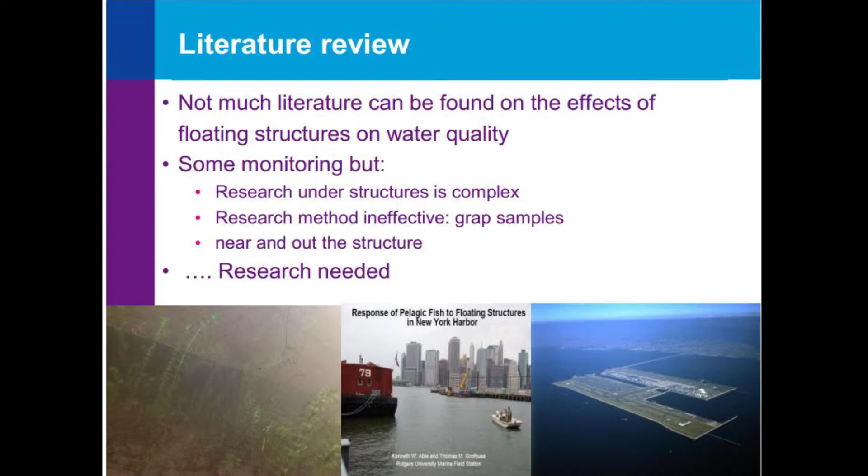So not a lot of literature is found, so more research is needed. That's basically why we conducted this research.

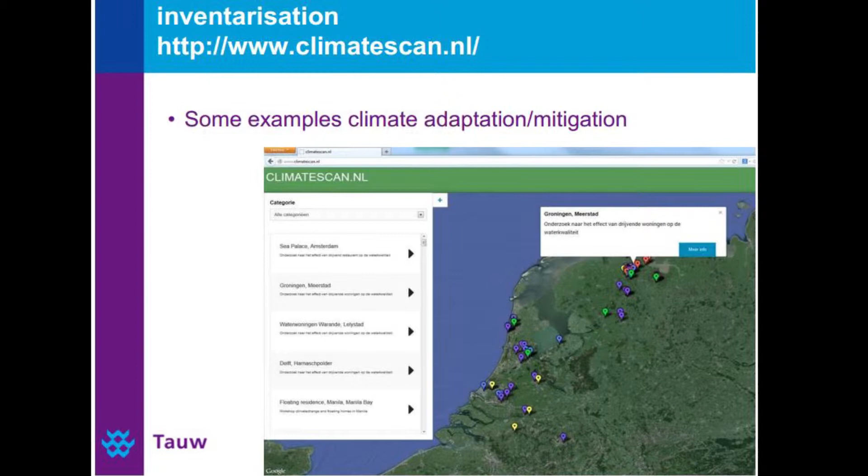So, well, I told you about inventarization. This is a website called the Climate Scan. There are a lot of mitigation and adaptation measures on here from the Netherlands. And when we filter it, we have these research locations on floating homes, which you can see here.

In the Netherlands, there are about 30 locations with floating structures, houses, and other structures as well, which I will show you. On this website, you can click on the locations, and it will provide you a lot of information on the structure itself and on the knowledge, articles and papers being written, and some videos, which I will show you later on as well.

This is a Dutch site. If you zoom out, there's actually some information on Manila, for example, from the Philippines, some workshop that we did two years ago. So it's really meant as a knowledge exchange tool.

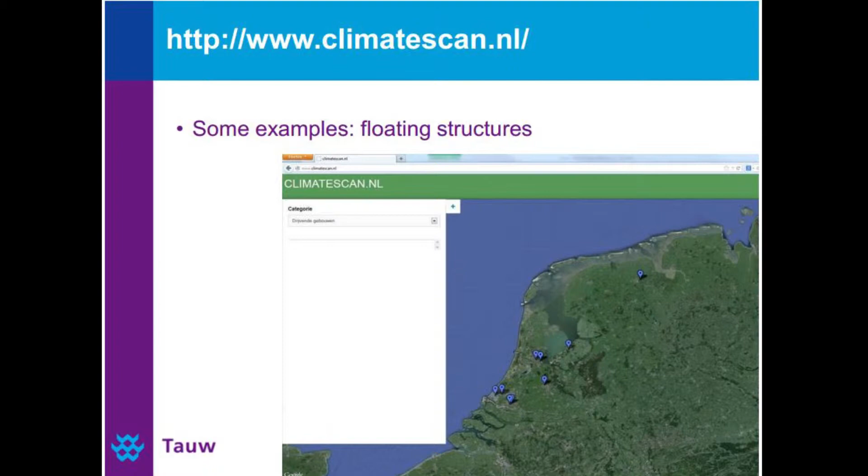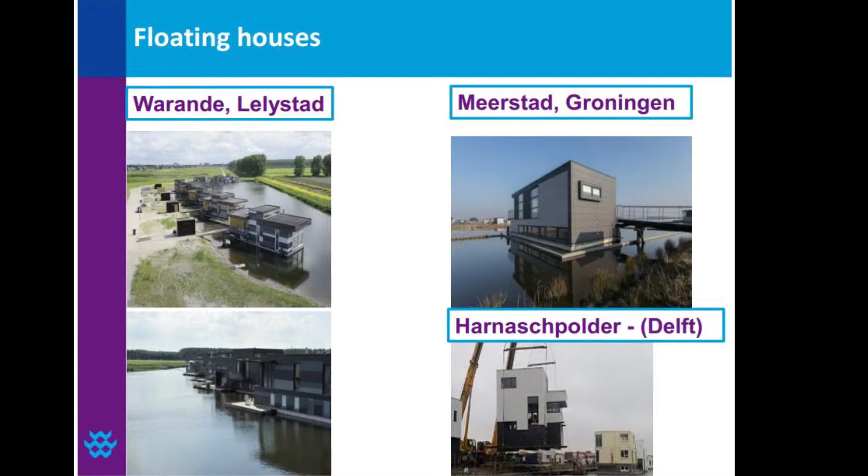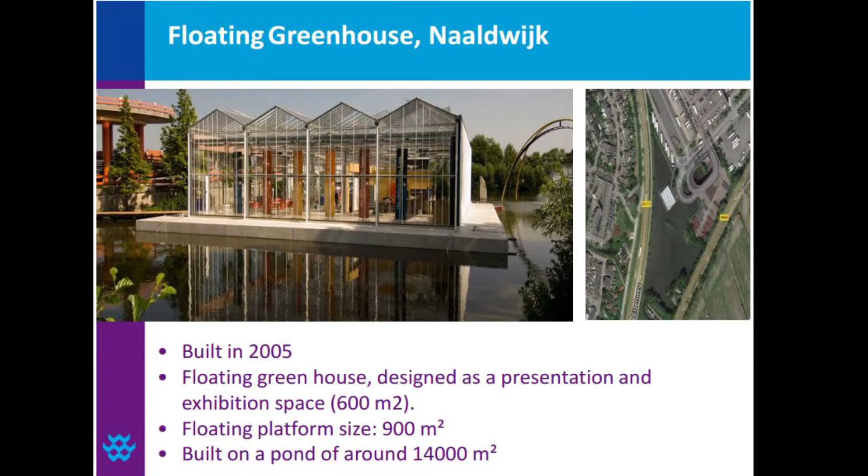So, well, some of these examples of floating houses, you've probably seen some here. There's some in Groningen, Lelystad and Delft that we've done some research on. But besides houses, there is a floating greenhouse, for example, in Naaldwijk, built in 2005. There's some other structures too, like living boats, quite huge in the Netherlands. Groningen is one of the cities that has a lot of living boats, as well as Amsterdam and Utrecht, for example.

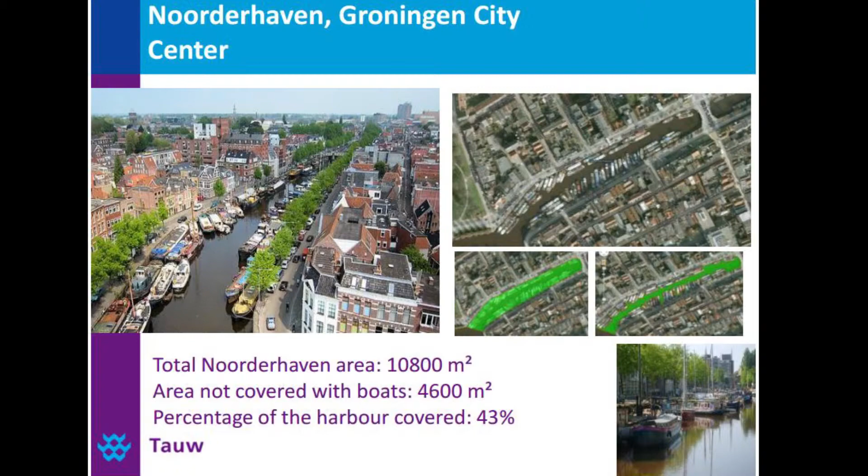Who are in this study as well. This is Noorderhaven. As you can see, if there should be an effect of floating structures on the water - in some sections, there's even like two-thirds of the surface being covered by floating houses. In this case, not even connected to the sewer, so you could expect some water quality effects on this. It's quite an interesting location that we did research on as well.

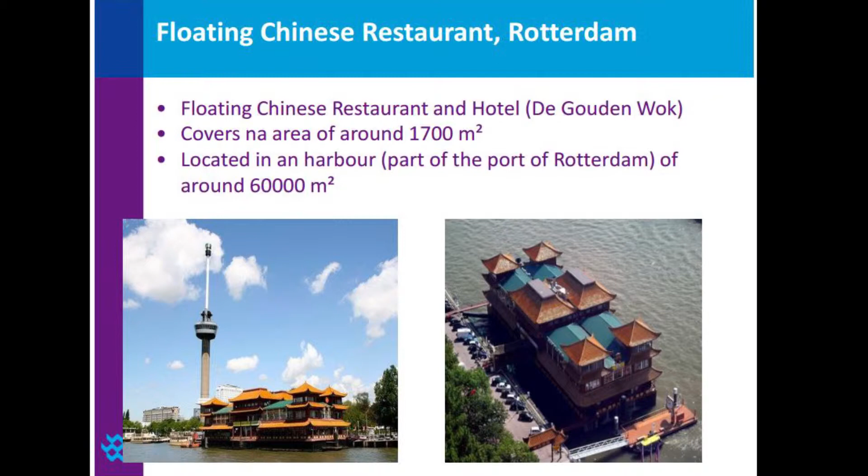A floating Chinese restaurant in Rotterdam, for example, you might have seen it. You might think that Rotterdam has it all - this conference, the floating Chinese restaurant, the floating pavilion. But in Amsterdam there's a floating Chinese restaurant as well, and it was first. It might reveal where I come from, so to promote Amsterdam a bit as well. So that's one of the structures as well.

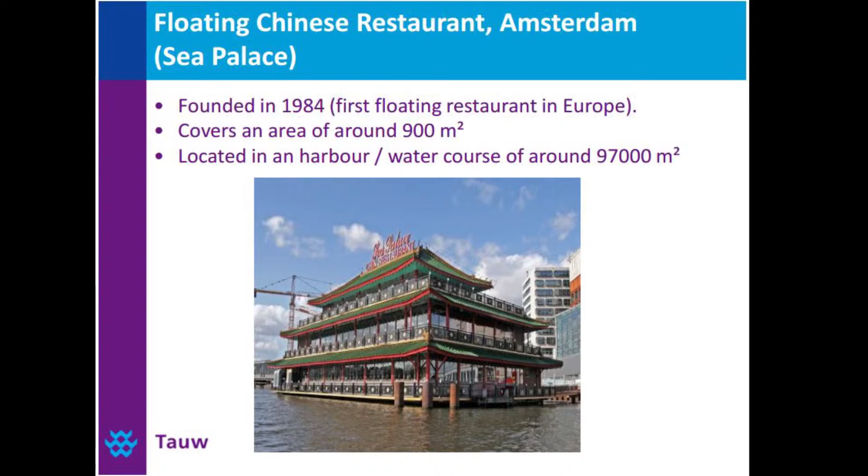Anyway, water quality measurements - there's not a lot of literature, so we should do more measurements on this. But as mentioned before, it's quite hard to get under structures in this case, and it's very dangerous for divers to go under there and take measurements, for example.

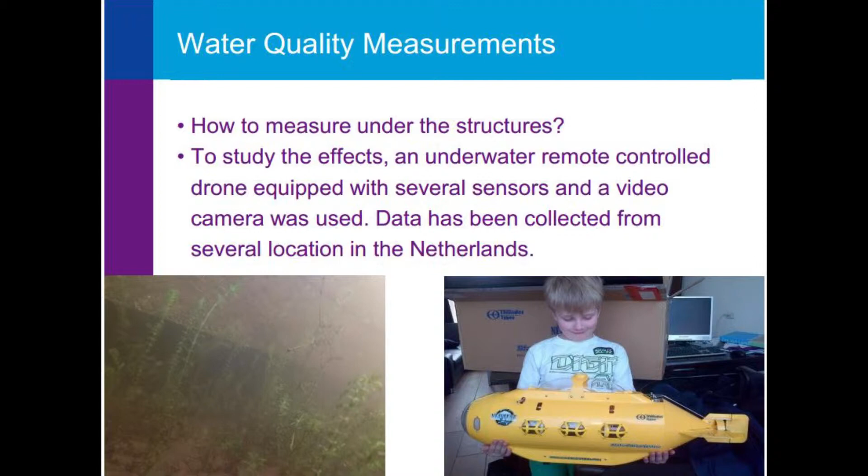So we did some innovation, and one of the innovations that we put in this project is using drones, which is much safer, and we can locate it under the structures - and well, it's more fun. My son here, 8 years old, loves this idea of the drone. But that doesn't make it scientific. If you want to make it scientific, you should place a lot of sensors on this.

So that's what we did actually - a lot of water quality sensors. You see the drone getting in the water here. It's about 9 kilos in weight. And what it does basically is measure nitrate, ammonium, with some sensor - oxygen is one of the most important things we have to measure to rate the water quality, so to say. Temperature, of course, under the structure and beneath. Pressure, which basically means how deep the drone is under the structure in this case, and conductivity as a parameter of water quality.

And one of the things that we put there as well is a diving light, because it's quite dark underneath, and there's a camera on it as well, which lets you see a lot of eco life if there is any.

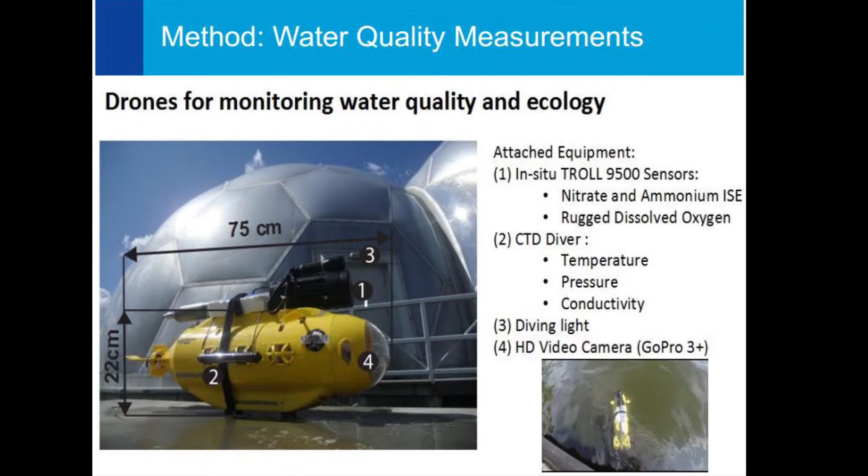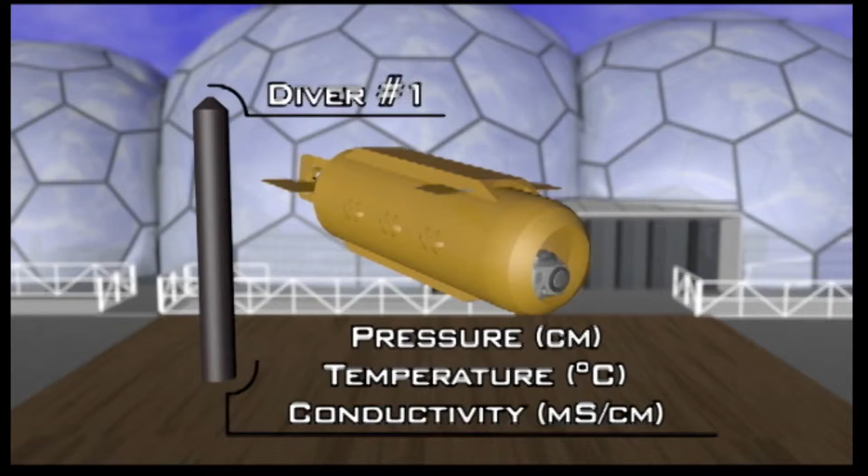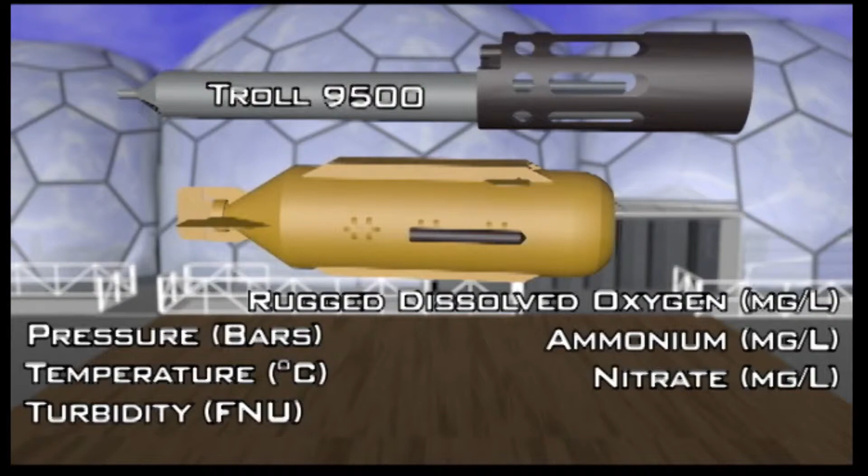So I can have a lot of talk on this, but I'll just show you a video of the drone and some of the locations that we've been working on. This is the drone and some of the sensors that we put on it - conductivity, pressure and temperature, ammonium and nitrate, and oxygen, of course, which is mainly the biggest parameter to use.

So, one impression of the locations - not really stable, but it's an artist's impression. A Danish Dogme, if you will, from Von Trier.

So these are some of the structures, and especially of interest is, of course, the bigger structures in this case, because we could expect a bigger impact on the water quality. This is Groningen, for example - it was on the news last weekend in this case.

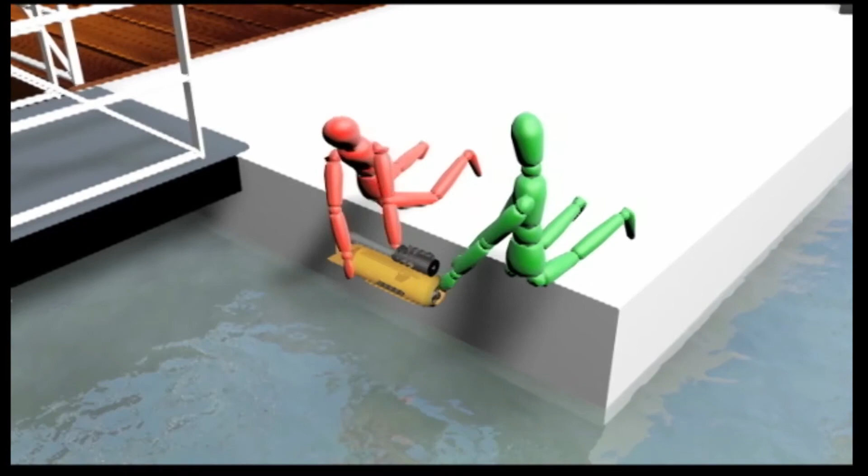Also video images - as I said, there's a GoPro camera on that, which shows the life, or what the state is after a couple of years of implementation. A green guy and a red guy, blue and black. The drone goes into the water, and basically what we do is sink it down to the level of the floating house, and we try to get it underneath.

What you can see here are some of the values running with the experiments, and some eco-life - mussels, if you will. You see some fish as well. So it's quite interesting to get under the structures and see all this life.

We should really make a documentary on this - fun. So this is in Lelystad. Looks like an aquarium. This is on the outside, and this is underneath. And what we saw in other places as well, like Amsterdam, we saw a lot of fish, basically on a lot of structures, and sponges and some eco life on there as well.

Here's an impression - this was basically the hard point in Groningen, which I mentioned before, only like 20 or 30 centimeters. You see some fish going under there as well. And a lot of partners.

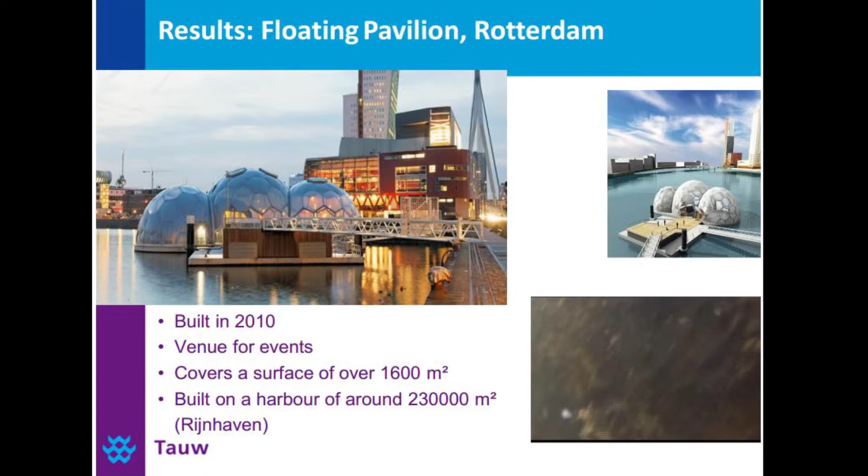Okay, so back to some of the results, because of course the pictures are nice, but we need graphs - we need to prove what the difference is. This is the floating pavilion, you've already seen, we saw some footage on this as well.

So you should really compare points on the same depth, on the same oxygen level, for example, or ammonia. Basically, there's not a lot of difference on this structure. We can go with the drone a couple of meters under the structure, but that's basically what it allows us to see in this case.

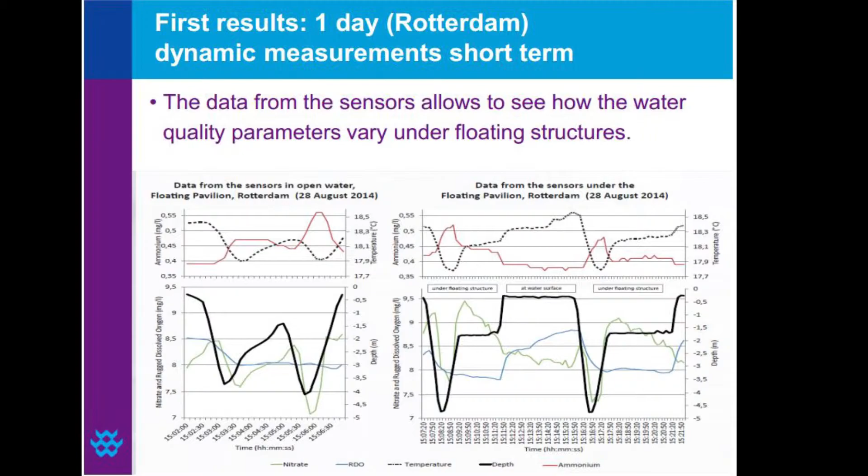So there's a poster hanging on the wall, so if you want to get in detail on this, we could explain some more. The one I showed there, that's just with the drone, so it's very short, just momentum, so to say. What we did as well is put sensors on there for a couple of days.

And of course you have day and night variations, so you should see some difference. In this case, the oxygen level in Amsterdam - what you do is place some sensors underneath the floating homes in this case, and on some reference points.

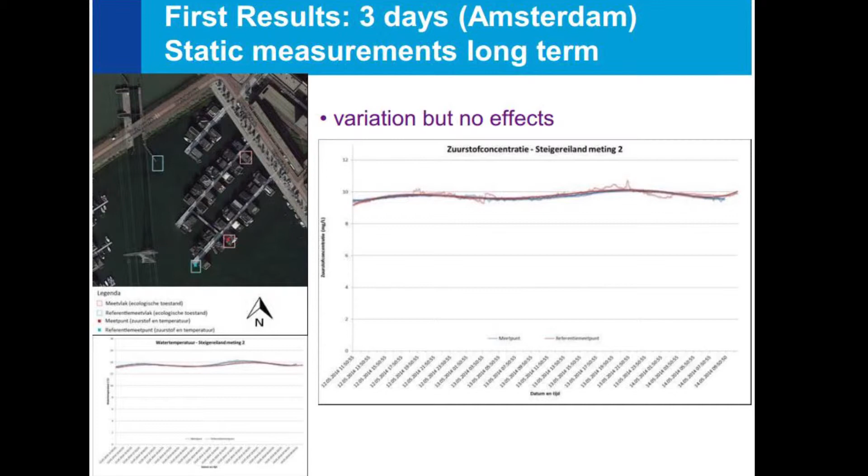What you can see here is basically no difference at all, no variation, no effects. But it's not the same on every location, of course. So this is in Utrecht.

Again, static measurements for 3 days, for the long term. What you can see is some difference here, but not a large one. As you can see, the scale is just 1 milligram per liter in this case, and that follows it basically.

In most of the locations, especially in Utrecht, if you go to Climate Scan, you see in the video a lot of movement of water underneath the structure. So it would be mostly logical that the water quality moves as well, as does the ecology.

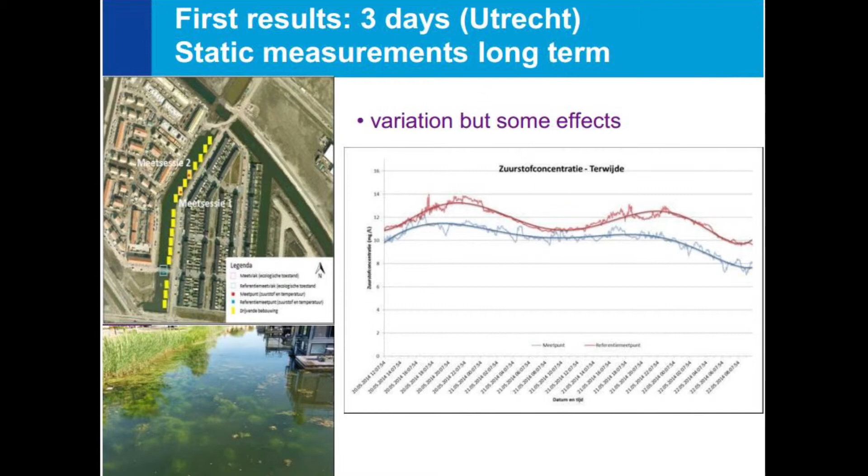And here, the last example, Naaldwijk, where you can see more variation in this case. But basically, if we look at the average, it would be considered - no significant effects would be the scientific term, so to say. And here are the sensors that we have been using.

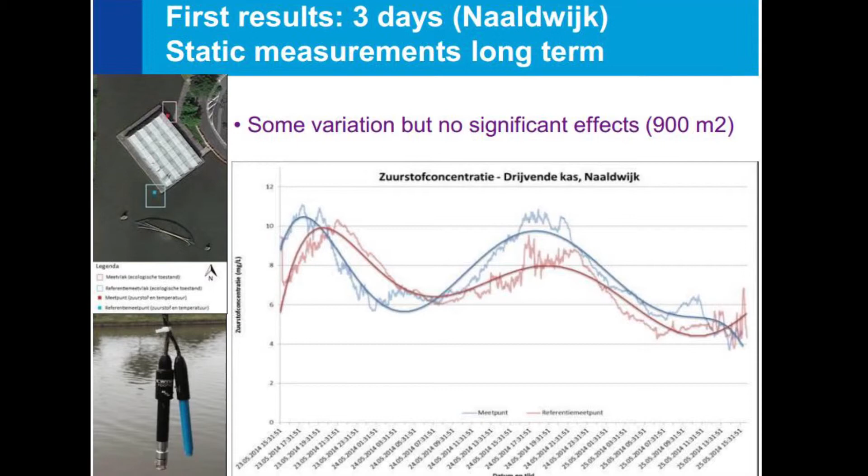So the first results, to conclude from this research - and we're going to go on, of course. These are some of the data we've been presenting, and we're going to go on and make this into a scientific report on all locations, which we need for a representative view on this.

But what we see now is that small-scale floating projects like houses don't have a lot of significant influence on the water quality. Of course, the next step will be going to bigger structures and seeing if we have some implications or impact there.

Two, I think what's quite interesting from this research is already the footage we have of life captured on the video camera, which is of course a very good indicator on quality. And showing this to a lot of builders and water authorities already provides evidence that there isn't a lot going on basically with small structures, so to say.

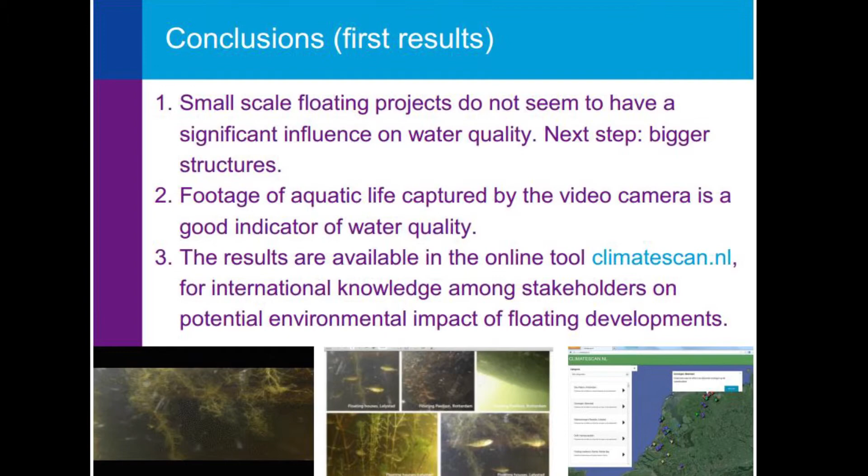Of course, we would like to transfer this knowledge onto the online tool, as I said, Climate Scan, and get stakeholders informed about potential environmental impact on floating developments and get that message across. So that's basically my talk. Thank you for your attention.